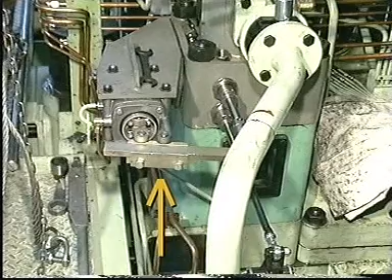The variable injection timing system comprises VIT actuators located on the fuel pumps and pneumatic components located on the control console at the side of the engine.

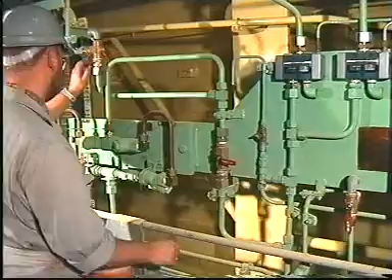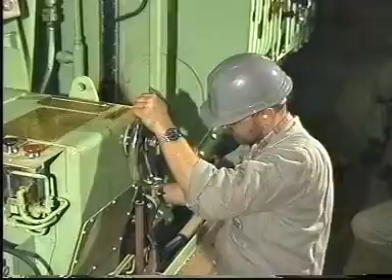Supply 7 bar control air pressure to the pneumatic components on the engine side console. Switch control from the engine room to the engine side console. Turn the regulating hand wheel until the tapered slots of the two levers are aligned.

The throttle non-return valve must be fully open before adjusting the VIT system. Loosen the lock nut and screw the spindle counterclockwise as far as it will go.

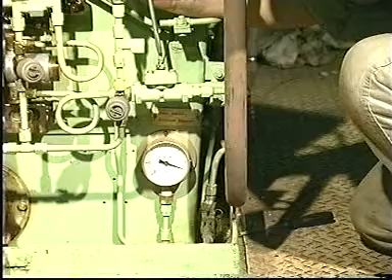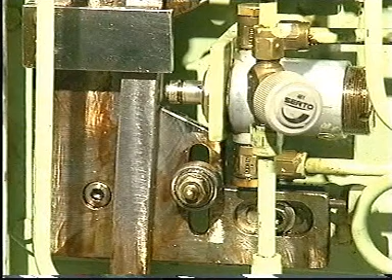Make sure that the pressurized air reaches the VIT actuator. It may be necessary to switch the changeover valve manually. The pilot valve must be adjusted so that when the spindle is pressed 8 mm inwards, the control air pressure will be 5.5 bar.

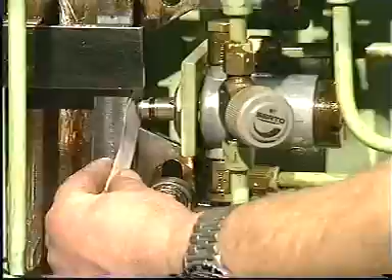Turn the regulating hand wheel so that the steel bar just touches the pilot valve. Insert a distance piece with a thickness of precisely 8 mm. If the control air pressure deviates from 5.5 bar, loosen the lock screw and turn the spring retainer cap of

the pilot valve until the pressure, which can be read on the pressure gauge on the engine side control console, reads 5.5 bar.

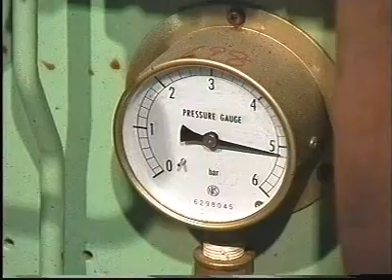Note that it will not be possible to obtain the correct pressure if the throttle non-return valve is not fully open.

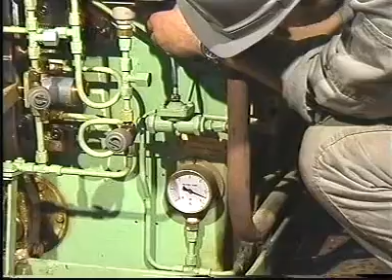Screw the spindle clockwise until a pressure drop can just be registered. Screw the spindle counterclockwise 1 revolution and lock it in this position with a lock nut. This position prevents a sudden increase in VIT index and thereby a sudden increase in the maximum combustion pressure.

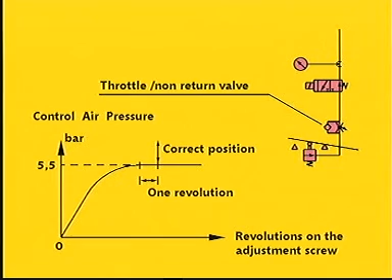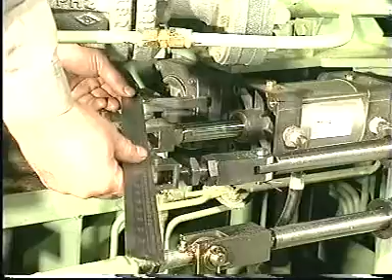Make sure that the VIT index is set at 0. Measure distance R between the two pivoting points. Note down the result.

Measure distance L between the pivoting point and the center line of the VIT rack. Note down the result.

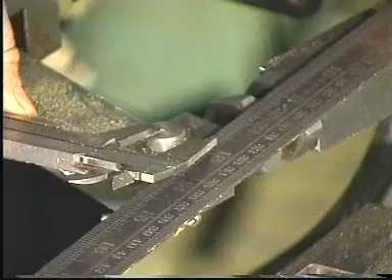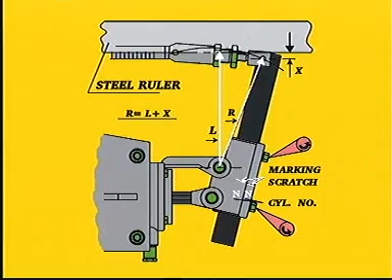In the event that R does not equal L plus X, displace the lever until new measurements confirm that R equals L plus X.

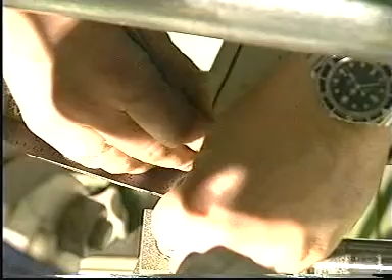When the correct position is obtained, mark the position of the lever and stamp the cylinder number on the locking plate and lever.

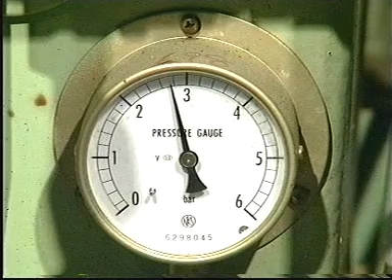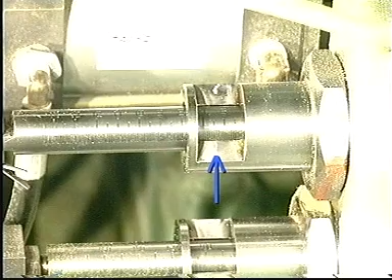Turn the regulating hand wheel until the pressure on the pressure gauge reads 2.75 bar. The VIT rack must be adjusted so that the middle index of the VIT rack can be read when a control air pressure of 2.75 bar is applied. If the actual VIT index does not correspond to the middle index, adjust the link until it does.

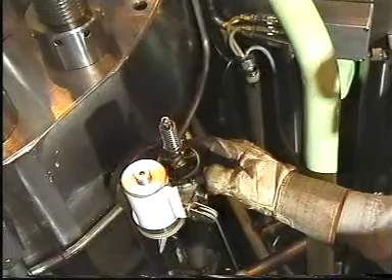Start the engine and run it up to a load corresponding to the breakpoint load. Use the indicator drive or PMI system to adjust the load until it corresponds to the breakpoint load.

The mean indicated pressures of the individual cylinders must not deviate more than 0.5 bar. If the deviation is more than 0.5 bar, adjust the load distribution on the fuel index rack of the individual cylinders. The engine is now running at the breakpoint.

At this load, the steel rod must touch both pivoting points. If the rod does not touch both pivoting points, adjust the rod in accordance with step 2.3 of this film.

Measure the maximum combustion pressures of each cylinder. Adjust the links or displace and lock the VIT racks so that the maximum combustion pressures, corrected to ISO ambient conditions, are uniform and have the required values.

Note down the fuel pump indexes and VIT indexes.

Run the engine up until it corresponds to 100% MCR. Use the indicator drive or PMI system to adjust the load so that it corresponds to 100% MCR.

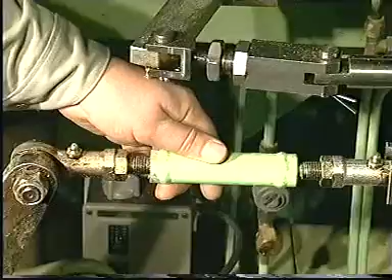The mean indicated pressures of the individual cylinders must not deviate more than 0.5 bar. If the deviation is more than 0.5 bar, adjust the load distribution on the fuel index rack of the individual cylinders.

Again, measure the maximum combustion pressures for each cylinder. Adjust the links or displace and lock the VIT racks so that the maximum combustion pressures, corrected to ISO ambient conditions, are uniform and have the required values.

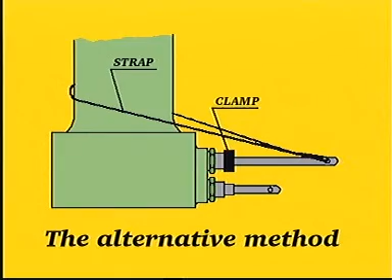Note down the fuel pump and VIT indexes. Note down the VIT indexes at breakpoint and 100% MCR and calculate the average index.

Determine the middle value of the VIT rack and calculate the difference between the middle index and the calculated average index. The result of this calculation will determine how much the cams are to be turned.

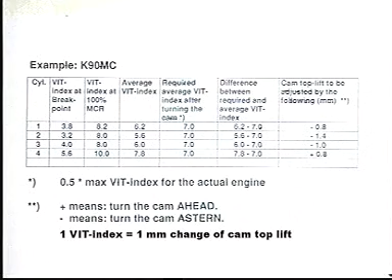If the result exceeds 0.5 millimeters, the cams must be turned according to step 1.6 of this film, after step 1.5 has been completed. The purpose of turning the cams is to distribute the breakpoint and 100% MCR service points evenly around the middle value of the VIT rack.

Note down the VIT indexes at breakpoint and at 100% MCR and calculate the difference. Add half of this difference to the middle value of the VIT rack. Subtract half of this difference from the middle value of the VIT rack.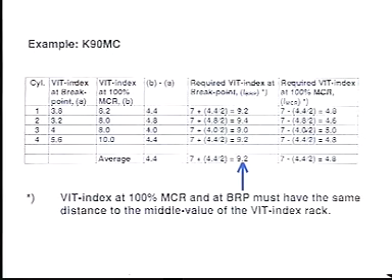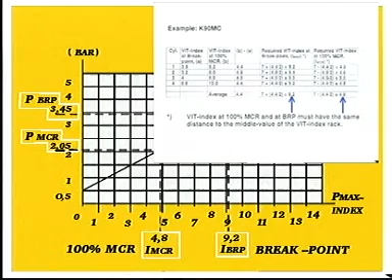Calculate the average VIT index at breakpoint and at 100% MCR. Determine the control air pressures corresponding to the average VIT index at breakpoint and at 100% MCR.

Stop the engine before making any adjustments. Make sure that control air is able to pass the changeover valve.

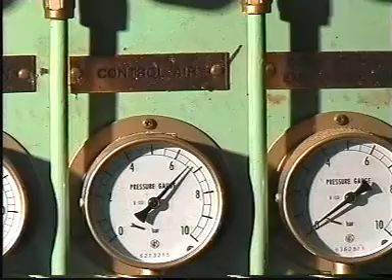Supply a control air pressure of 7 bar to the pilot valve. If the links were adjusted in step 1.4, then adjust again so that a control air pressure of 2.75 bar corresponds to the middle value of the VIT rack.

Turn the fuel regulating handle to the breakpoint position. At this position, the steel rod touches both pivoting points. Displace the pilot valve bracket until the calculated control air pressure at breakpoint is obtained.

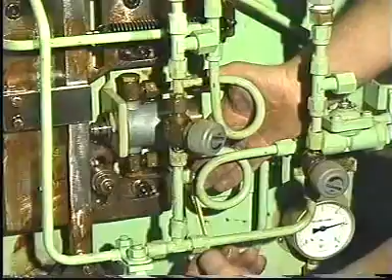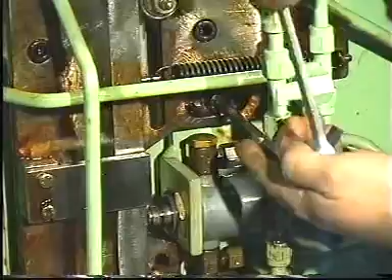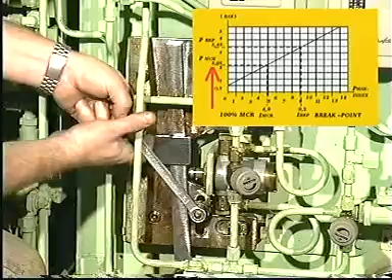Turn the fuel regulating handle to the 100% MCR position. Displace the lowermost pivoting point until the calculated control air pressure at 100% MCR is obtained. Start the engine and run it up to a load corresponding to the breakpoint. Make sure that the control air pressure is able to pass the changeover valve.

Fine adjust the links so that the maximum combustion pressures, corrected to ISO ambient conditions, are uniform and have the required value. Load the engine until it corresponds to 100% MCR and fine adjust the lowermost pivoting point so that the maximum combustion pressures, corrected to ISO ambient conditions, are uniform and have the required values.

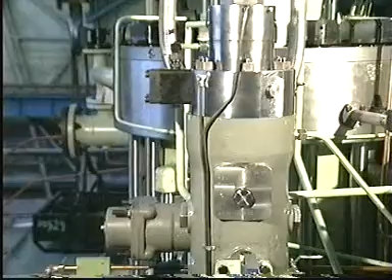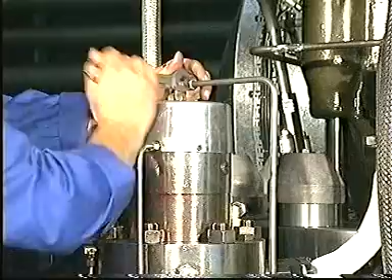Cams must be turned if the value calculated in step 1.4 of this film is exceeded. The actual fuel pump lead must be determined before turning the cams. Make sure that the reversing links are in the ahead position. Disconnect the air pipe and remove the cover from the puncture valve.

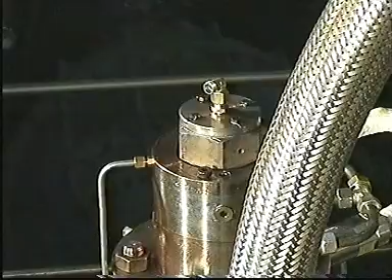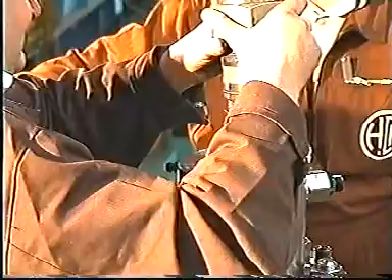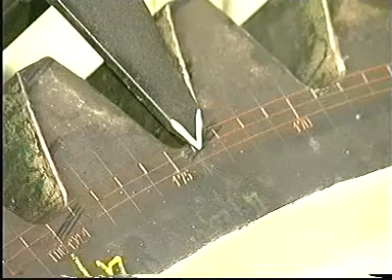Remove the plug screws to provide access for the measuring tool. Remove the puncture valve. Mount the measuring tool, making sure that it engages correctly with the bore in the top of the fuel pump plunger. Turn the cylinder concerned to top dead center.

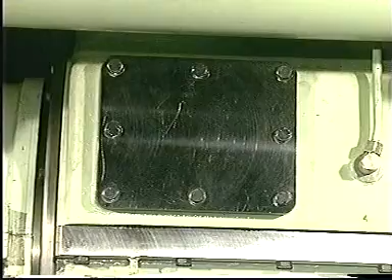Read the actual fuel pump lead directly on the measuring tool. Read the VIT index. If the VIT index is not at 0, the lead must be corrected before it is recorded in the engine logbook. Carry out fine adjustments through the small cover.

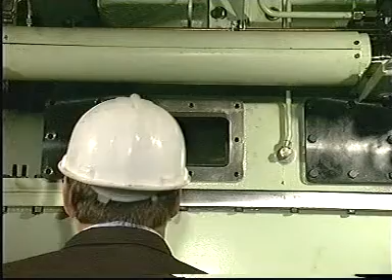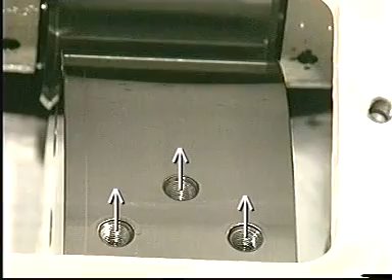If the camshaft has been dismantled or if new cams have been mounted, adjust the cams before mounting the lower part of the camshaft housing. Remove the plugs from the cam and insert copper gaskets.

Mount, but do not tighten, the snap-on couplings. Connect the snap-on couplings to the high-pressure pump and vent the system. When oil without air bubbles flows from the couplings, fully tighten the couplings.

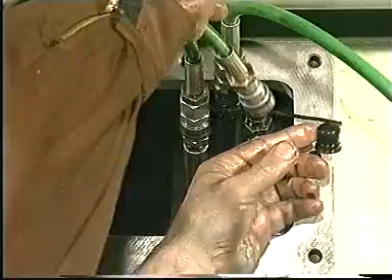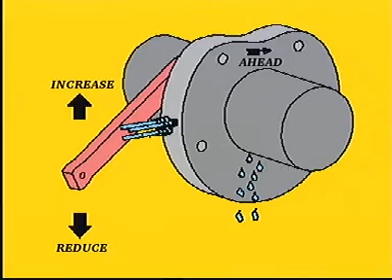Turn the engine until the special spanner can be mounted, then raise the pressure until oil seeps out between the cam and camshaft. Read the measuring tool once again before turning the cam. Turn the cam in the required direction. See also step 1.4 of this film.

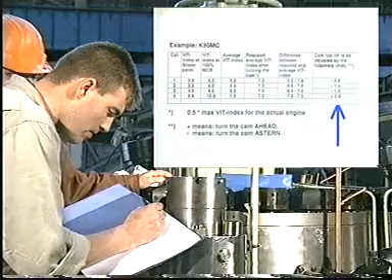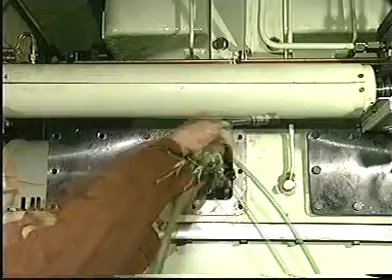Follow the turning of the cam on the measuring tool and stop turning when the required change has been obtained. Relieve the system of pressure and remove the spanner and hydraulic tools. Leave the cams to settle for a minimum of 15 minutes and then mount the plugs.

Turn the cylinder concerned to top dead center and read the new fuel pump lead. Read the VIT index. If the VIT index is not at 0, the lead must be corrected before it is recorded in the engine logbook. Mount the cover of the camshaft housing.

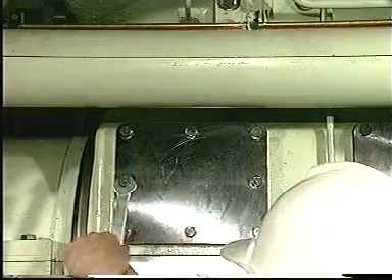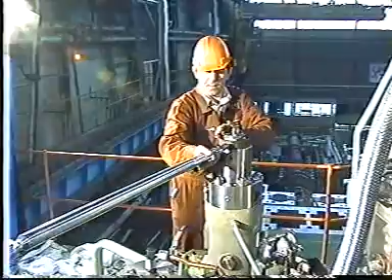Provide the puncture valve with new sealing rings and lubricate with molybdenum disulfide. Tighten the puncture valve to the torque stated in the instruction book, Volume 2, Chapter 909, and mount the plug screws, cover and control air pipe.

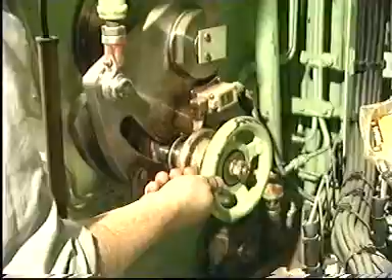Finally, change over to normal engine control. Make sure that the VIT system changeover valve is properly connected.

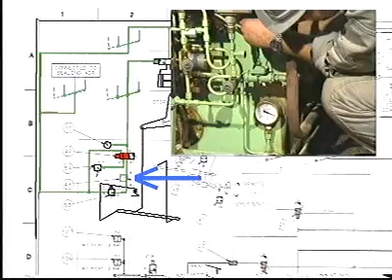The system will have to be adjusted when certain components are replaced. Regarding the throttle non-return valve, see Part 1, Step 1.1 of this film. Regarding the pilot valve, see Part 1, Step 1.1 of this film. Regarding the VIT actuators, see Part 1, Step 1.2 of this film.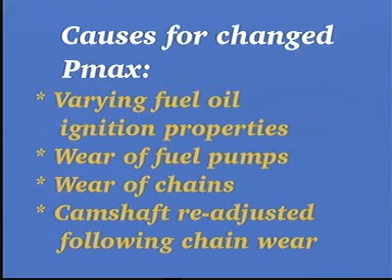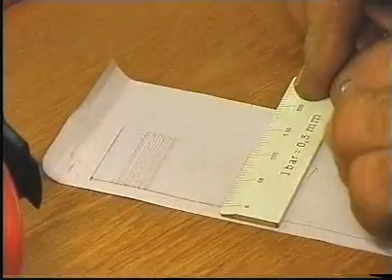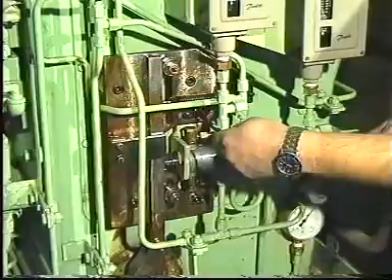Measure the maximum combustion pressures regularly, especially after bunkering new fuel oil. Adjust the individual links until the maximum combustion pressures, corrected to ISO ambient conditions, are uniform and have the required value. If all the maximum combustion pressures are either too high or too low, displace the pilot valve bracket.

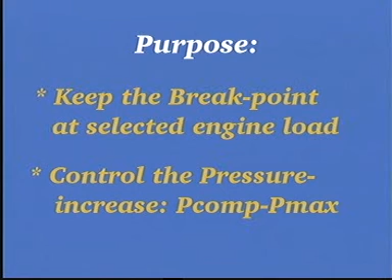The purpose of this adjustment is to keep the breakpoint at the selected engine load and to control the pressure increase. An excessive pressure increase may lead to a poor cylinder condition. In this event, contact the engine builder before making any adjustment.

Start the engine and run it up to a load corresponding to the breakpoint load, and hereafter to 100% MCR load. Use the indicator drive or PMI system to adjust the load so that it corresponds to the breakpoint load and 100% MCR load. Note down the fuel pump indexes.

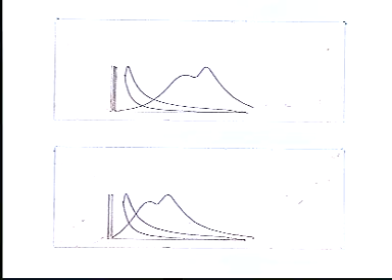The mean indicated pressure of the individual cylinders must not deviate more than 0.5 bar. If the deviation is larger than 0.5 bar, adjust the load distribution on the fuel index rack of the individual cylinders.

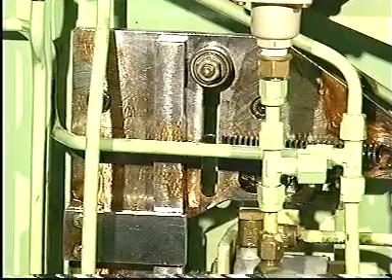Switch from engine room control to control from the engine side console. Turn the fuel regulating hand wheel corresponding to the determined fuel pump index at breakpoint. If the steel rod does not touch both pivoting points, loosen it from the shaft and turn it to the correct position.

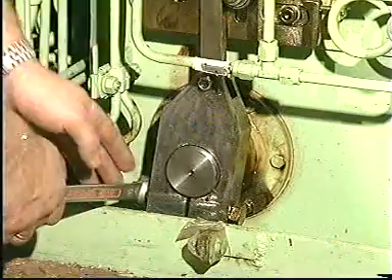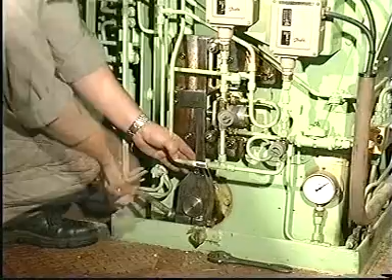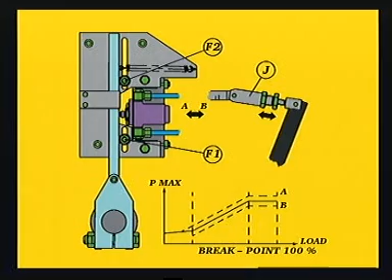Start the engine and run it up to a load corresponding to the breakpoint load. Make sure that the steel rod touches both pivoting points. Adjust the links until all maximum combustion pressures are uniform, and then displace the pilot valve bracket until the average combustion pressure, corrected to ISO ambient conditions, is at the required value.

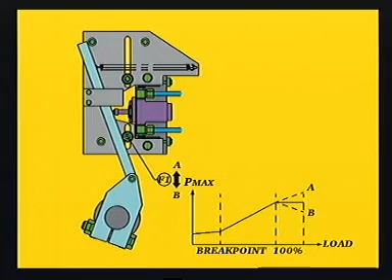Load the engine so that it corresponds to 100% MCR load and displace the lowermost pivoting point until the average combustion pressure, corrected to ISO ambient conditions, is at the required value.

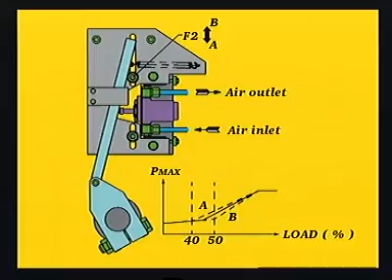Decrease the load until it corresponds to 40 to 50% MCR load and displace the uppermost pivoting point until the VIT racks just start to move inwards. This occurs at a control air pressure of about 0.5 bar. Lock the pivoting point in this position and change over to normal engine control.